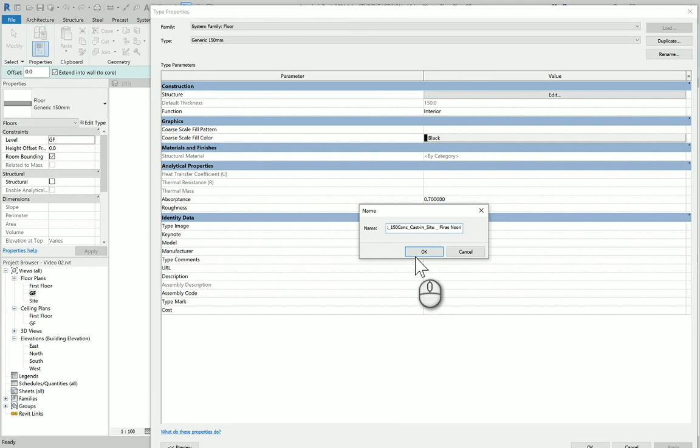It's really important to add your name. 150 as a structural part is more than enough - it's exactly a happy coincidence.

I'm going to keep the structural part, you just need to apply a material, so write here concrete, and here we go, that's the cast in situ. We loaded the material in the right place - insert, then go up and change that.

In this case, I'm assuming that the slab beneath and above are actually the same, so whatever you use here, Finish 2 [5], will be accepted for the exam or basic modeling techniques. Again, it should technically be divided into 2 slabs, one beneath and one above.

I'm going to detail that in a later lecture if you follow the playlist, at the exact location of this video on the playlist. This shall be changed, or must be changed, according to the location.

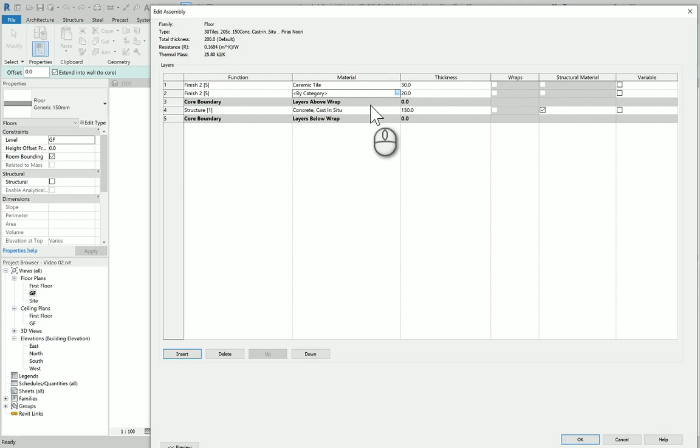Just to emphasize again, I'm going to insert another one. I'll assume it's also an internal one, and we have 30 by 20, and this one should be tiles. I don't care what type of tiles pop up, I'm going to choose it - you can specify later what type of tile you want, and even design it in detail.

Again, not at this level - that's the secret, this is more than enough for me. I'm going to say okay, and then okay again.

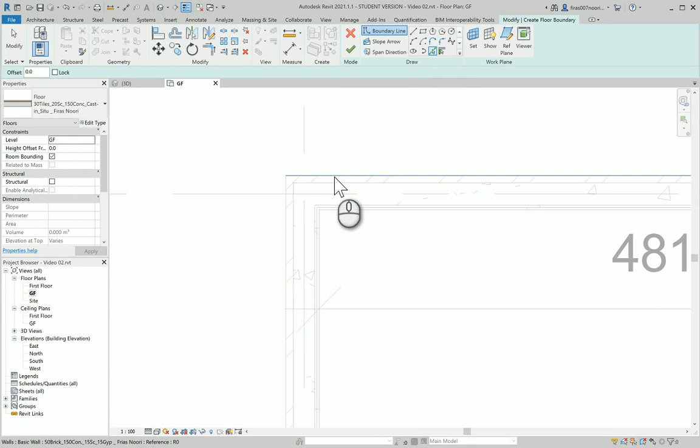Again, I'm going to pick the external lines. You shouldn't actually do this - again, we're going to detail that later, you should pick this line specifically. But for the sake of making it very basic modeling, I'm going to select the external one, which leaves the slab visible from the elevation or any perspective, which is kind of ugly and not realistic, but it's generic modeling, so I'll assume that will be accepted.

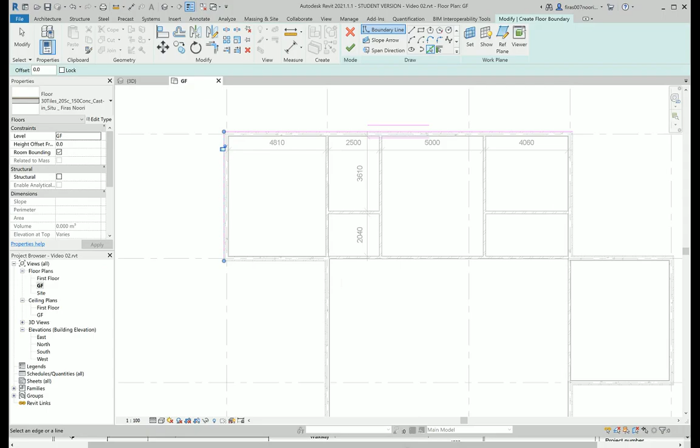The slab inside is 0, as you can see in the plan, outside is different. I want to see if there's an extension of that - there is none, so the slab is located exactly under the building only at that specific level.

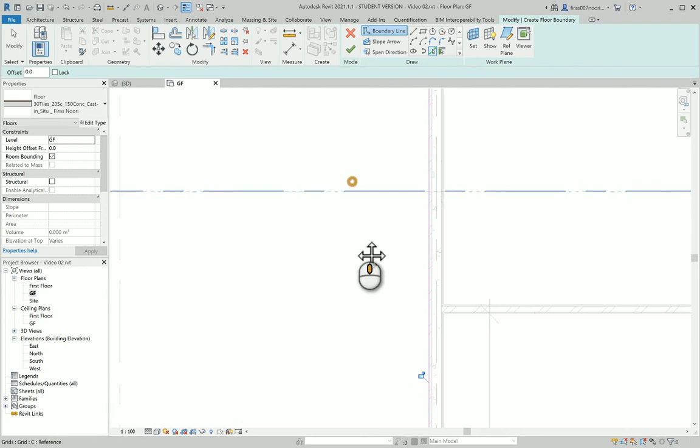Now Revit makes sure to connect the lines to start and end exactly at each point, but it wouldn't hurt you to look at each corner to make sure they're meeting each other - no gaps or overlapping, otherwise you'll get annoying warning messages with orange dotted marks showing where it's open or overlapping. Specify its location - I'm going to be on the ground floor for now, so I'll say yes, that's it.

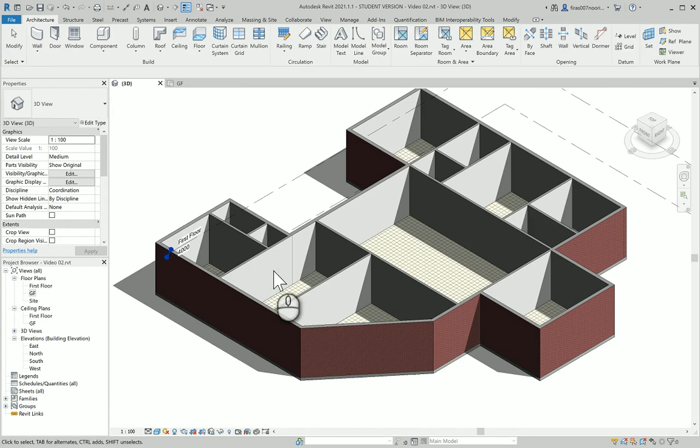The fastest way to deal with it is to copy that guy and paste it, copy to clipboard and then paste. Align to the first level, paste. But when you generate this via copy paste, it won't make an attach.

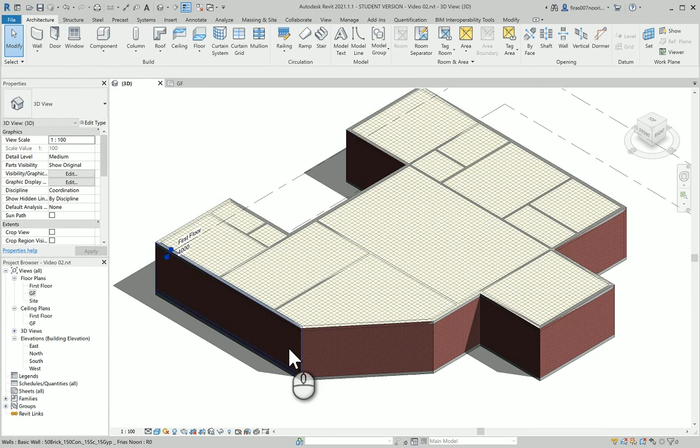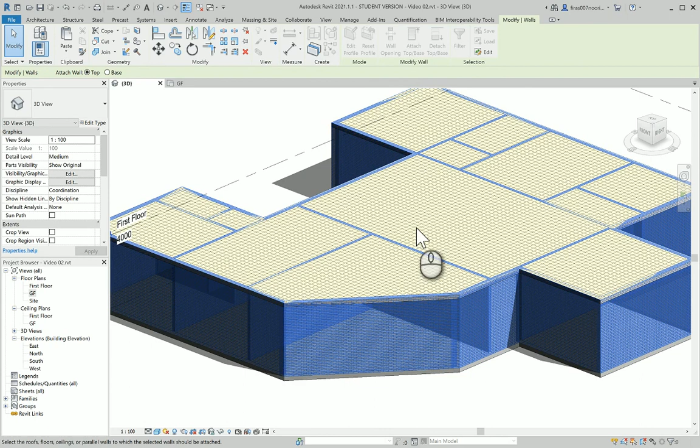That's a bit annoying, and of course you're not supposed to do that manually. So select everything you can reach, go to filter, remove the floors or anything else, remove any level you selected, just keep the walls, and attach top, then select the slab. I have this issue with my beginner students too - they just hover above the middle of the thing. Try to select the edges of the slab so you get it nice and clean, like this click.

Now it's completed. Let's have a look at the 3D to see if there's any cantilever or extension. There is an extension here, don't worry, don't freak out.

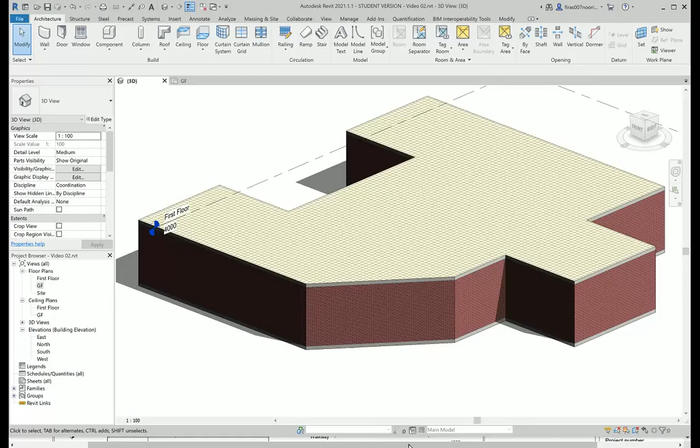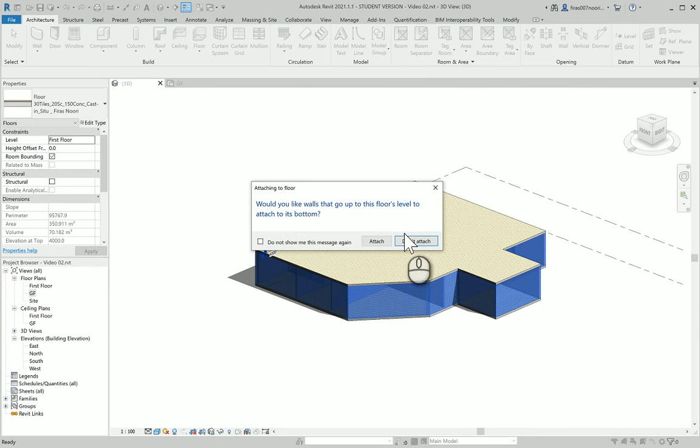Just take this one, go to edit boundary. It's very wrong, by the way, to fix things in the perspective the way I do, but I'm too lazy to do it the other way around. Select those two things and hit TR for trim. It's gonna ask you if you want to do it manually on level 1 to attach the walls. Don't attach, and again you're gonna see the slab. I said that shouldn't be done, but it's okay for this phase of learning.

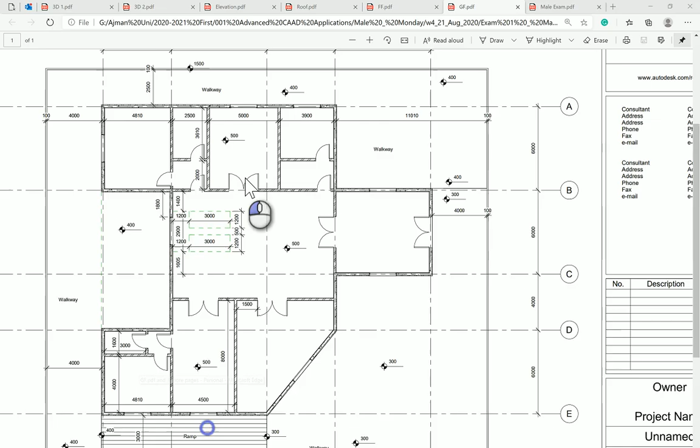We are here for week 4, very beginner, very early phases, so it's okay to leave it that way. Now it's time to look at the first floor. I have the habit of making the constructional envelope part and the external or internal one, mainly walls and partitions, external walls and partitions, slabs, parapets. Then go back for the doors and windows, which has less priority for me. That means GF is finished.

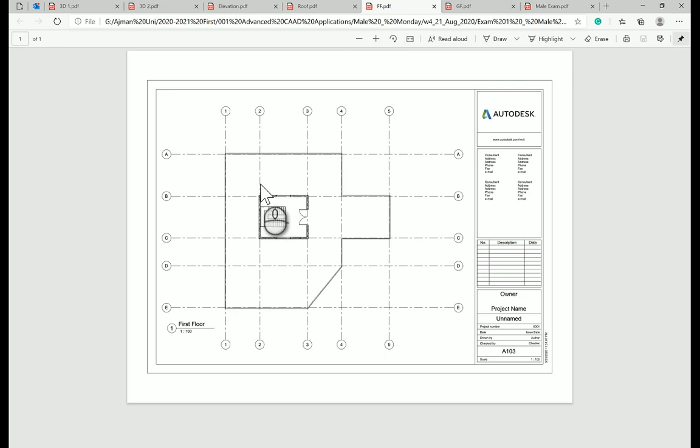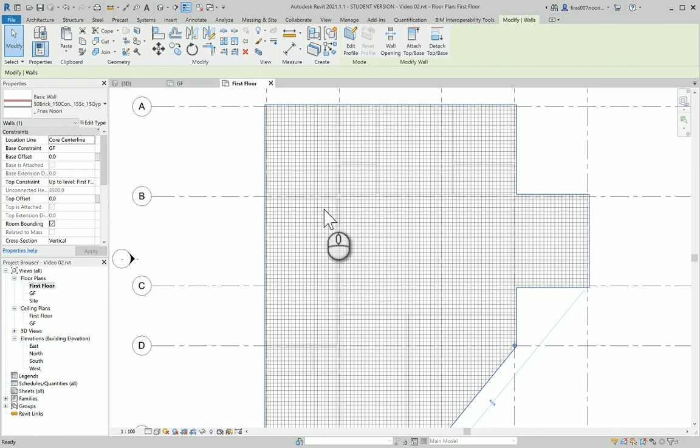Now first floor, jumping in, it's having the same walls as beneath, just located on 2 to 3, B to C. So we have this guy here, the 50mm brick. It's really nice to go to the first floor to do that instead of the plane. You can see lots of distraction here in the way, caused first by the tile pattern. So hit VV or VG on the keyboard, whatever suits you, and go to the floor.

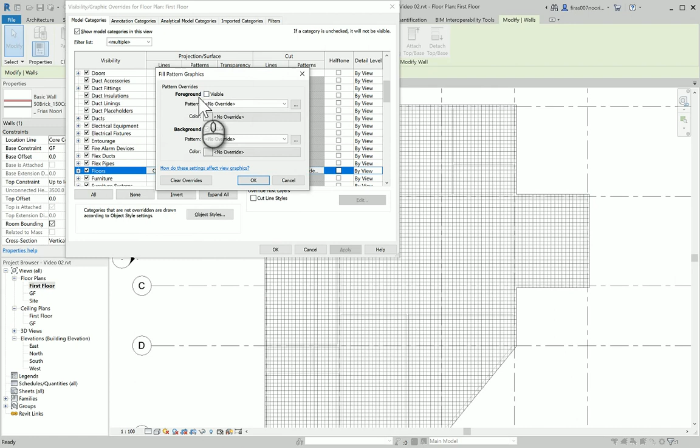Always make sure that when you select the floor, you don't turn the floor as a 3D element, but rather the pattern part of the projection - the elevated part you see in places where you don't cut. So the pattern when you see it as an elevation or projection, remove that guy from the foreground and hit OK, and that's sufficient to get rid of the annoying tiles for that level of work.

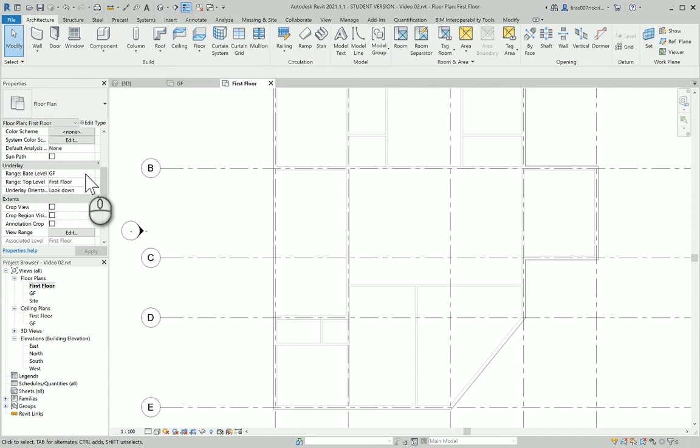Now you can see again, students also complain they're actually seeing the lower levels' partitions. That happens due to the view property, not an object property. Remember, if you don't select anything in Revit, the property panel will just show you the view property. So scroll down to the underlay and simply remove that guy to none - don't show me the underlay here - and that's much better, less painful to the eyes, unless you need that detail to work on the partition. But for me, I know very well I'm gonna need B, C, 2 and 3, so no need for the headache, and it's a good idea to remove those things.

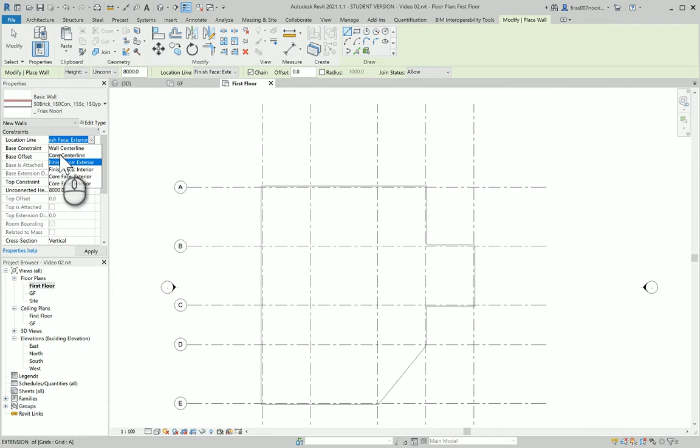Now the benefit of having your names popping up, it's really easy to select which wall you created. Make sure it's not a finished face - I'm gonna use the core center line - and make sure the levels detail here is set to fine. Also make sure you're doing the external part of the wall facing the outside, so that goes clockwise to get the correct result usually, but if it doesn't happen, just hit space on the keyboard.

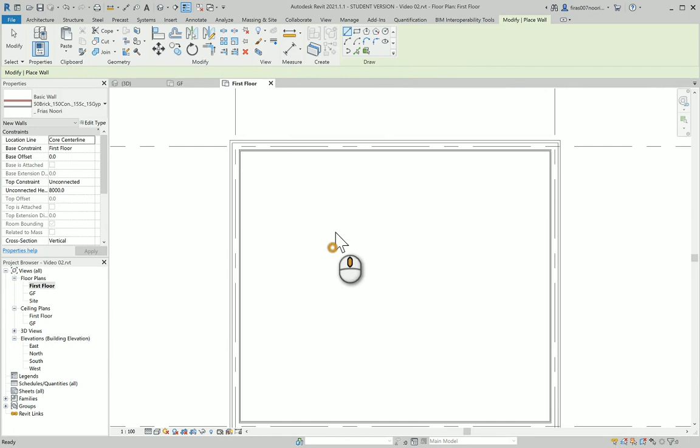Those things are nicely placed. Go to 3D - of course the height will be ugly and wrong, as you can see. We need to check both east and north elevation. Now as you can see, it's a mess as a tagging thing. It's okay, but again you have to create the level.

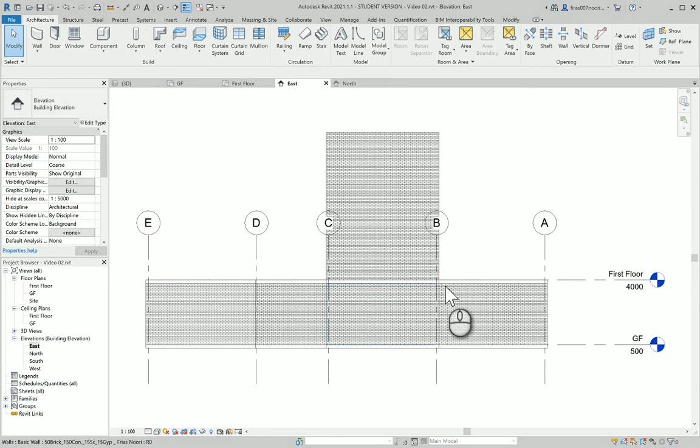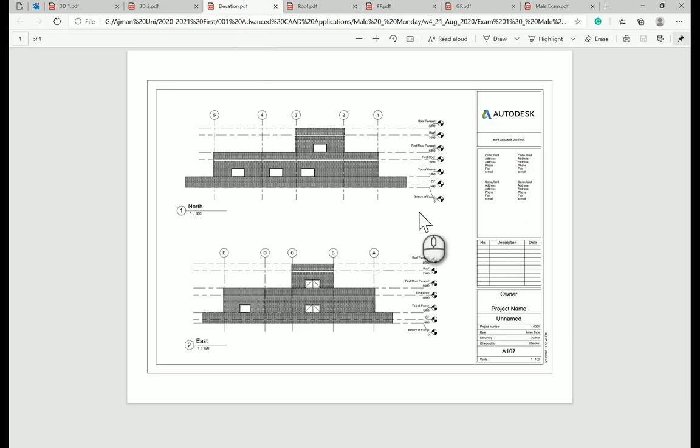So I'm going to stick with the east elevation, it looks like more has been taken care of. I'll extend this guy here and keep this bubble so I can show you the error you'll get if you keep them at that level. I'm going to lower them to make sure the error shows when I go to design the roof. So we need a level, and I had no idea where it was, so let's go to the elevation, zoom in, and see where the roof is located.

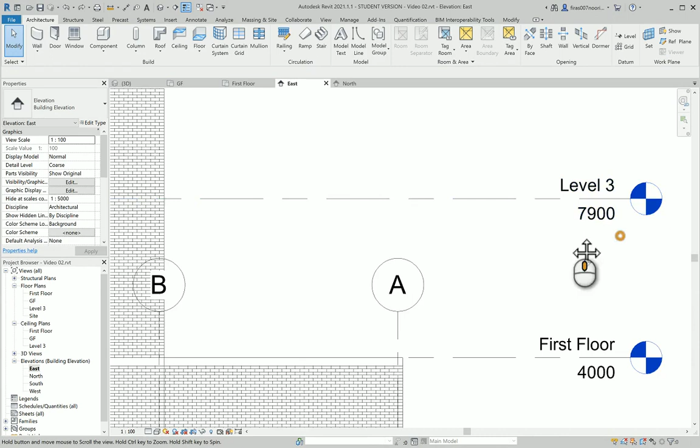It's 7,500. Beautiful. So go to levels, and I don't need to waste time on it. Double click here - I didn't mean to break it, so I'm just canceling the command with a couple of escapes. The breaking here is really happening a lot today. That's 7,500, and not the roof, not level 3, but rather we call it roof.

So rename the whole thing and accept the default setting to rename everything accordingly. And while we're here, it would be a great opportunity to get rid of the parapet. As shown here, it's 1000 mil, and again 1000 mil here.

That's nice, so let's do that. Just copy that, and remember, when you copy, it creates a level but without a floor plan - see, it's a black head. That means it doesn't have any plan associated with it, not like when you create it from the architecture level, which creates both a level and a floor plan. That's what we named roof a couple of seconds ago.

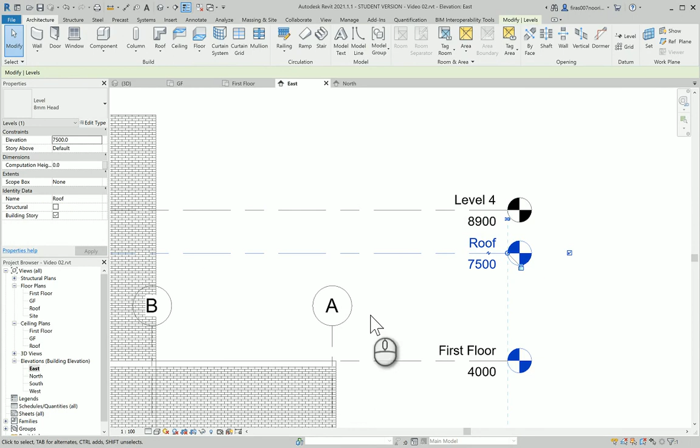Anyway, 8,500 here. Probably you need to break it because the text is actually overlapped, so break it and push it up. And the name definitely needs to be changed, so roof parapet.

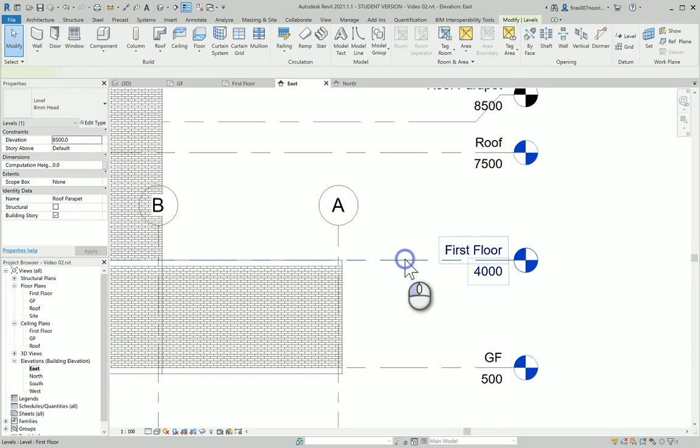And this needs to be copied also, so copy that guy up 1,000 - I'm dragging randomly, as you can see. So that's 1,000, and again break it, push that up. Naming is really important, so I'm going to say FF parapet again.

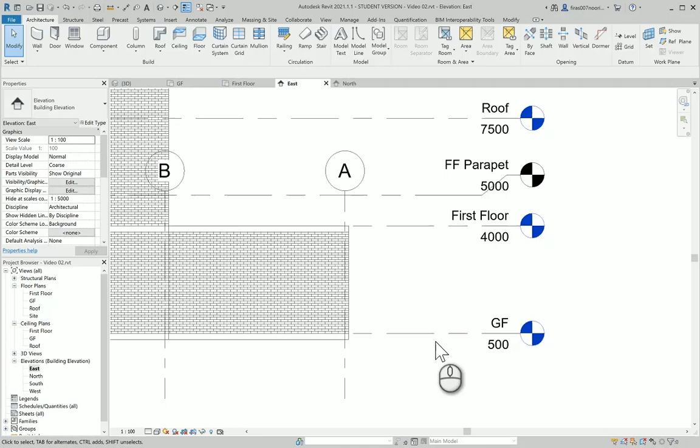And here we go, as well here, let's do those two things. So top of fence and bottom of fence, it's 0 and 1500. So it's time to copy - push that up 1000 and break it. And here we go, that's the top of fence.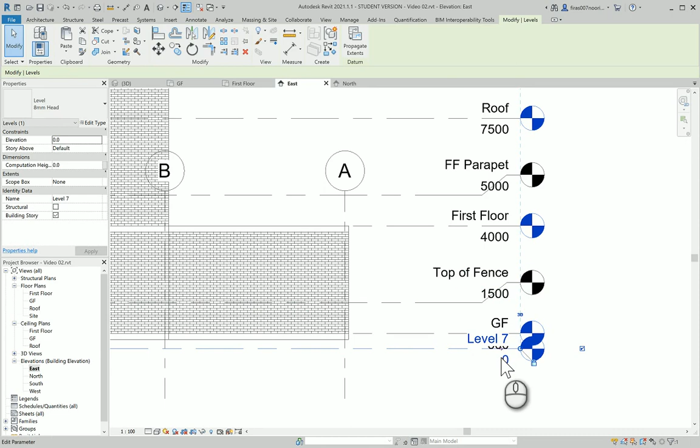And copy that guy down - 500 is enough, and break it, and drag it down a little bit more. And that's the bottom of fence.

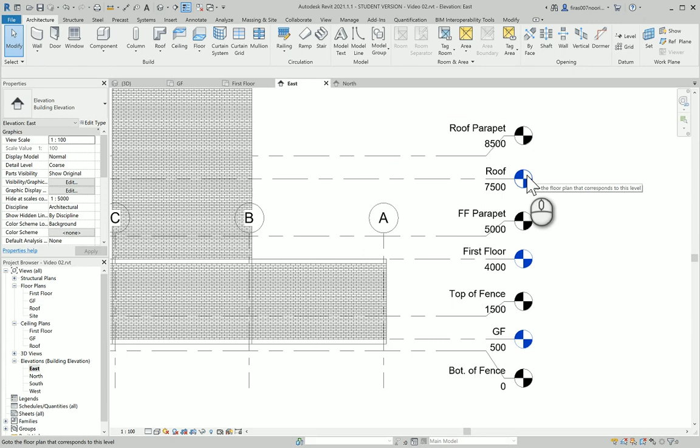And that's it - all levels have been set. Try to recognize and understand the black head versus the blue head. The black head doesn't have any floor plan associated with it, just levels. The blue one is both levels and floor plans. So now that's been done.

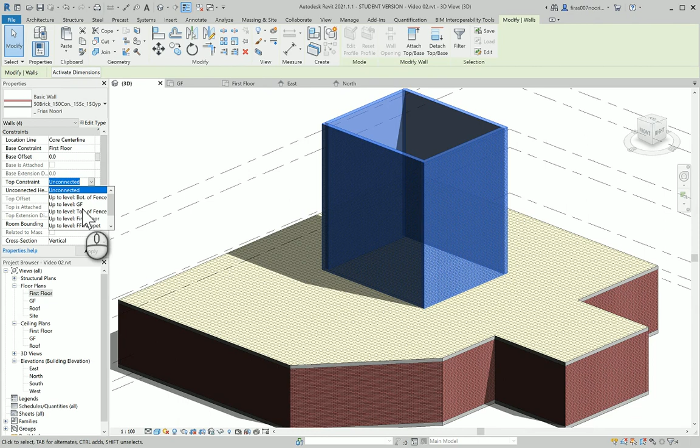The north elevation looks nice - sorry, the east elevation is actually looking nice. So now we can get back to the modeling, again first in 3D. Hover above the wall, hit tab and click, and then from the top constraint, choose the roof, isn't it? Yep, this one, and hit apply.

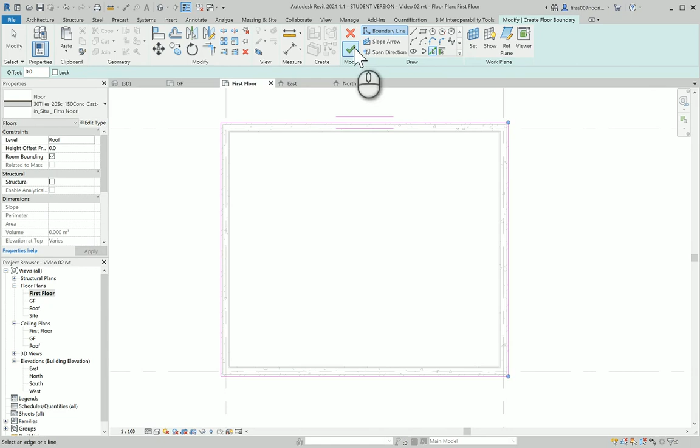Now in the roof, you can go to the roof and create the slab, or just go to first floor, which will be less painful. So floor, and again I'm picking the external walls, as you can see, and this time I'm placing it above - here on the roof, and hit apply. And when you finish, it's going to ask you to attach, accept, and go back.

As you can see, nice. Now the parapet, while we're in it - let's go to roof, and that's really the scary part. That happens because you don't see that the grid is not actually being extended sufficiently or correctly. And as you see, the roof is here - that's what we were looking at.

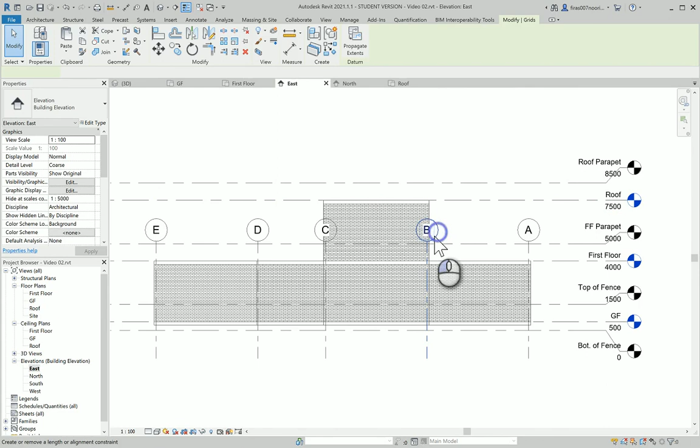We are looking above the roof by like 4 feet or something, and that doesn't mean I'm intersecting with the grids - that's why the grid is not being shown. So you have to make the grid higher as a level than the roof itself in order to get this intersection. When the intersection happens, you're going to see the ABC part of the grid shown.

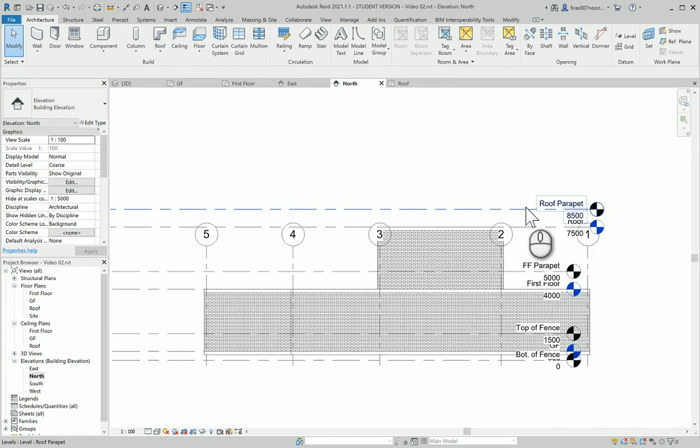That's what the student also complained about - why am I seeing ABC, because you just intersected them without the 1 2 3, and the 1 2 3 means you need to go fix the other elevation. That's the time you have to set it all properly, watching for that alignment blue line so they all get attached to each other. And for those in the class with me, I will cut grade if you don't fix this overlapping. The overlapping means you don't know how to do it, so you'll lose grade for it, boys and girls.

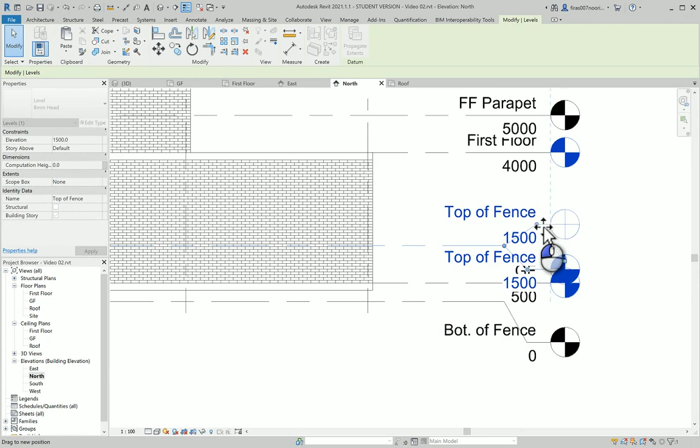Make sure you fix this accordingly using this elbow or breaking tool, whatever you want to call it. It won't take a second, so please do it—it gives a good indication of organized professional work rather than a messy result if elements are overlapping. Now push that up as you did in the other elevation. Things here look much better now.

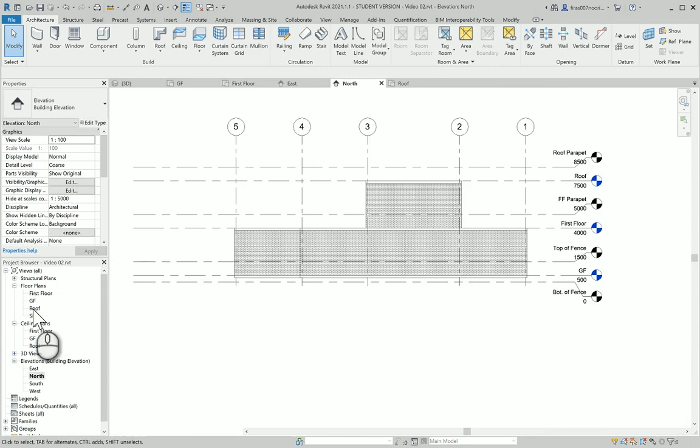If you go to the roof, you're supposed to see both X and Y, or horizontal and vertical grids. Now you should go and select one by one and tick the thing, but that's a bit boring, right? So go to the GF, select those guys, hit Control, and try to pick the propagate. Pick that on the roof, and then the floor.

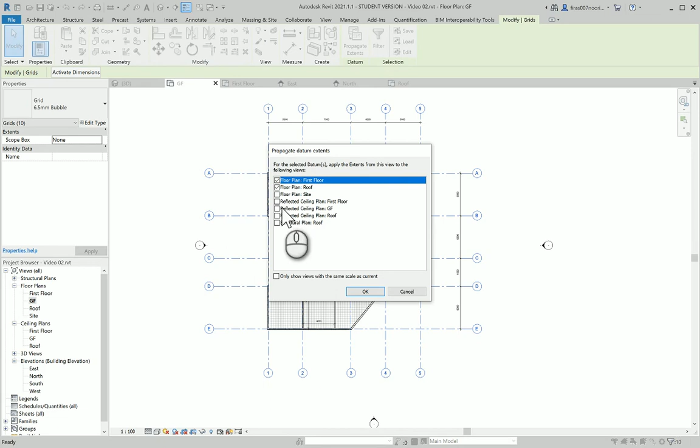Usually students go check the ceiling things, but ceiling plans are viewed looking up, not like those. I didn't actually click on them yet, so sometimes people click on them and go to the floor plan and don't see anything happen. Anyway, that will guarantee at least to fix this issue, as you can see.

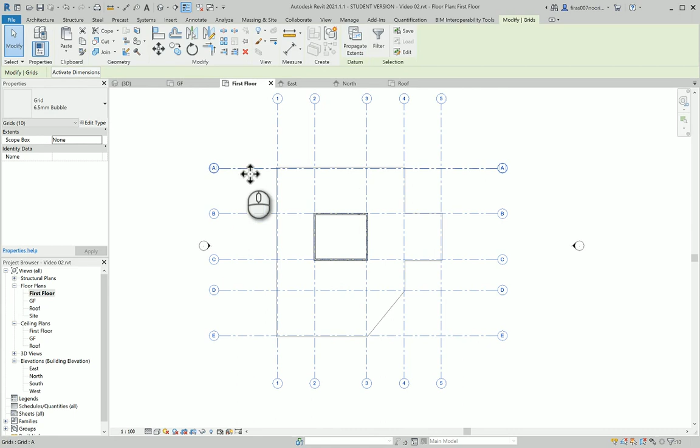Imagine if you have a tower with 200 levels or 150 levels and you want to do the grid one by one—I'm pretty sure your boss will kick you out of the company. So don't do that. Just use the propagate tool to propagate the decision you create on one level of a grid to any other group of levels you want.

So that's it for making the grid and the modeling. Now we need to go make the partition, the parapets. The parapets—I think it's been given as a specification here in the paper, where is it?

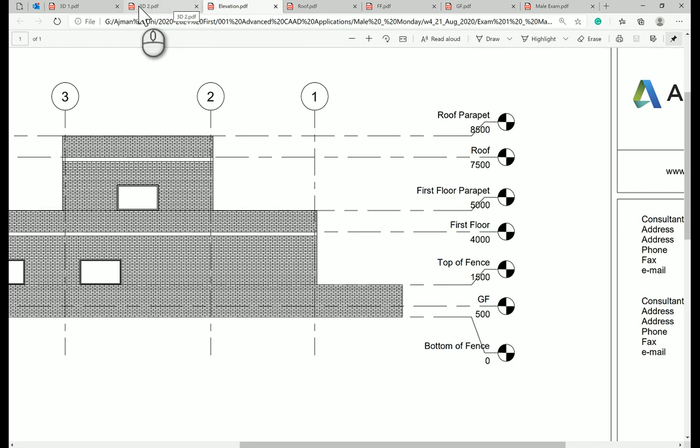Let's do that. First floor located at 4,000. Parapet is 100 mil brick, 1,000 mil high. That's all we need.

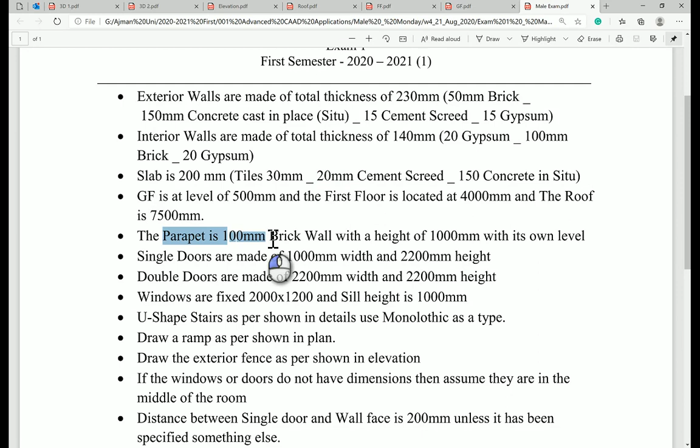Again, don't start from nothing—there's a 90 mil brick wall. Get it, duplicate it, and just say 100 brick and then your name. I don't know what happened with the brackets, they keep coming up.

Edit the type there and make it 100. It's easier than creating from a generic one, so try to pick something closer to your work wall or any other family type you want to create. Make sure you have function exterior.

You might need to get rid of the grid if it's making problems for you. This wall should go straight to the upper level, but I can see now it's unconnected, which disputes my hypothesis badly—it's going to be high and ugly again.

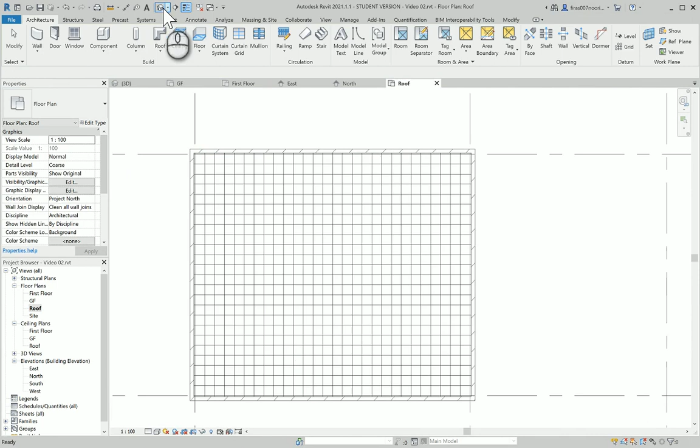No worries, just hover, tab, click, and pick that guy to be top of the roof or roof parapet, whatever we call it. Same technique you use on the first floor.

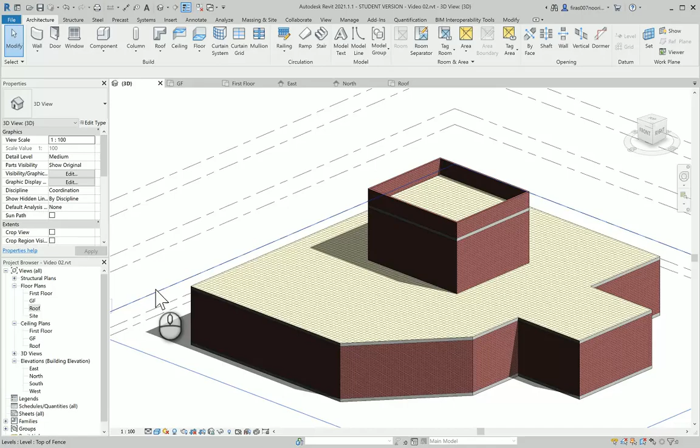Go all the way around the slab. You need to go to the first floor and again to the wall—the previous wall will be picked automatically. Just for God's sake, pick the top of the fence for the first floor parapet here from the beginning and hit apply, rather than leaving it for an extra step.

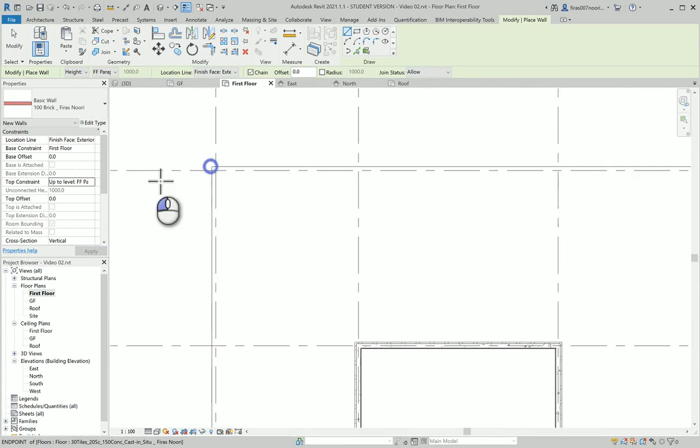That's good if you create the levels from the beginning. It depends, because in a bigger building with lots of levels, it will be very hard to pick the correct level—it will be painful. So create the wall and then create the level only for it.

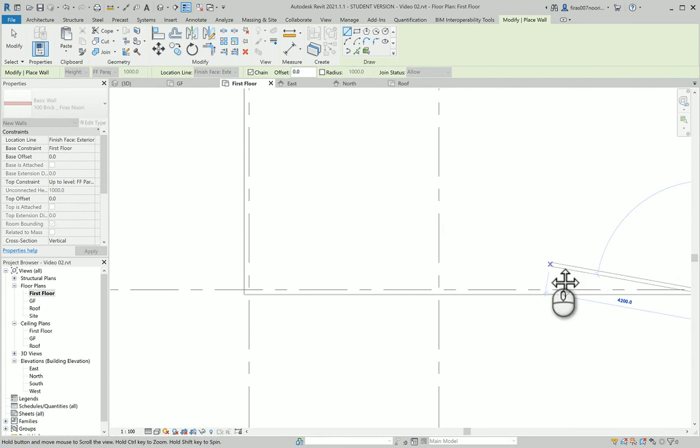It depends—for a small project it doesn't really matter. Actually in a small project, making the level previous to the parapet is much better, but that's not really true in bigger projects. So let's close that—it should be nice and fine now. As you can see, the external walls have been placed properly.

Now I'm going to place the outside quickly. I think we passed 20 minutes already, so let's go make the ground floor quickly.

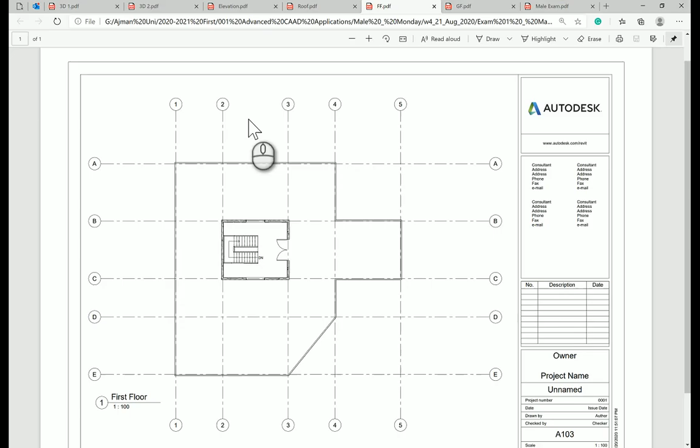So what do we have here? Again, it's the ground floor—back to the ground floor. It's 4,000 on the left side, 4,000 on the right side, and the floor is stopping here flush with the wall facing north, then stopping down facing east and west. Beautiful, so we have 4,000, 2,000, and 4,000.

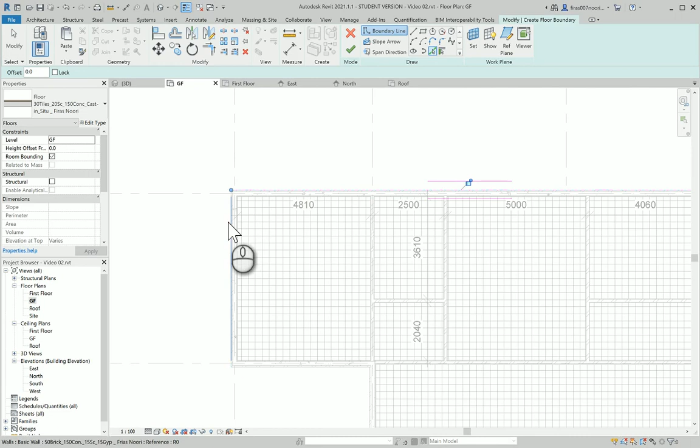I wish I could remember all this, but let me try my weak memory here. It's just a normal floor, and you need to pick those guys as such, quickly. All right, so those have been picked easily. Probably turning off the inner detail will make the pain less.

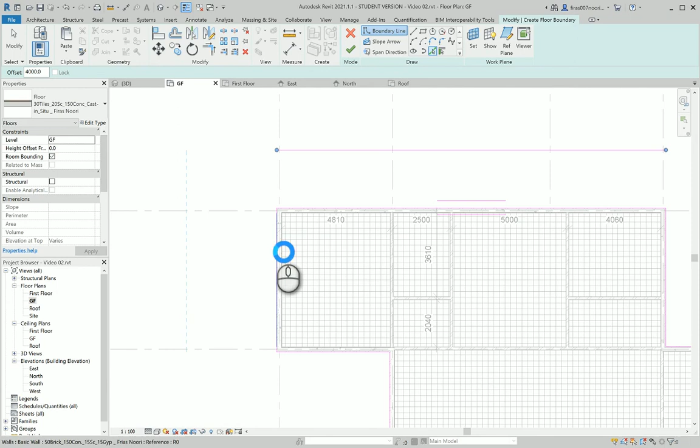We don't need this level of detail right now at that specific point. Now either go copy, or you can just activate the offset, so 2,000, and you can just pick the thing here. See, it's gonna draw it for you. Easier, the lazy method. And you can go here for 4,000 to the west and another 4,000 to the east, and that's the wrong thing, isn't it?

Yep. So I'm gonna take for the grid, or from the grid, and go DI and add the dimension to this point. Yep, that needs fixed. So select the line and make it 4,000. Just too lazy to do it the other way around. Get rid of the dimension.

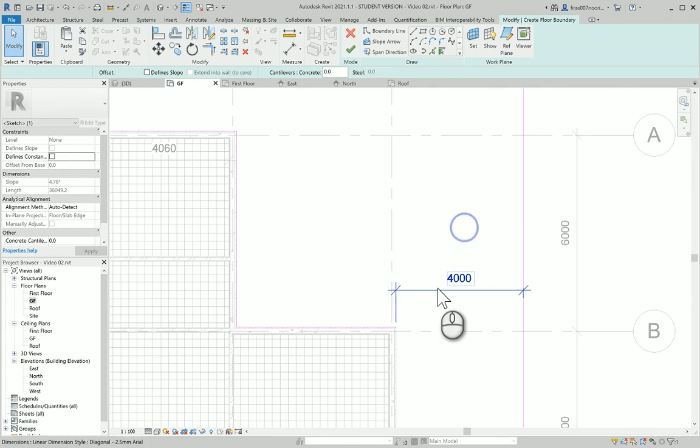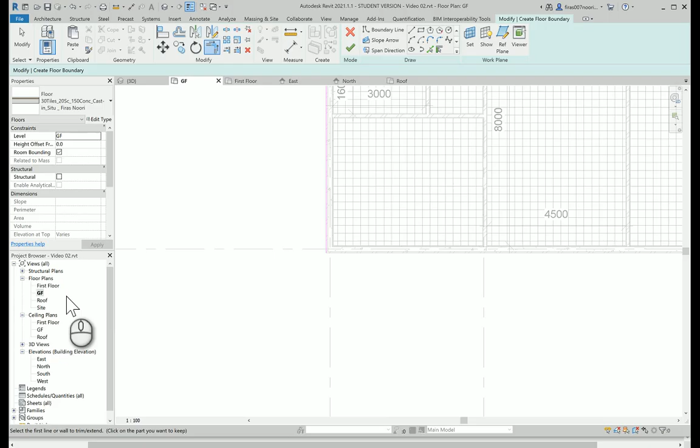Now TR on your keyboard and do the trim thing. This is a flush with this one. Oh god, now we need another one here. And how much? I absolutely don't remember. So it's a 2,000. Oh, it's a 3,000. Okay, it's a tricky question in here. And back, and probably you're gonna need to draw a line of 3,000 down.

That's for the ramp. Take it anywhere to the west. Make sure it's just horizontal. Then TR, select both, and the life, you're gonna be really happy with it. Now that's been done as a sketching boundary.

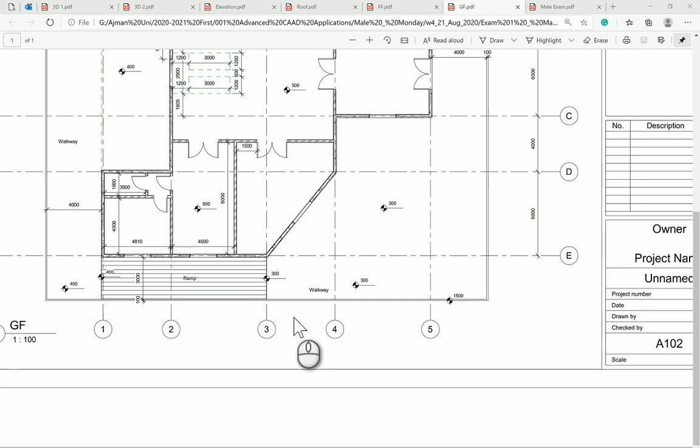Now you need to know the level. It's a 400, so it's minus 100 from the ground floor. You either do everything related to the ground floor, or you simply create a level for the walkway, which is going to be messy. So no, because we have two levels for the walkway, 400 and 300. So I'm referring to the ground floor, which is 500. So this guy should be minus 100, that's the ground floor. So minus 100 from the GF. Hit finish, and things going okay.

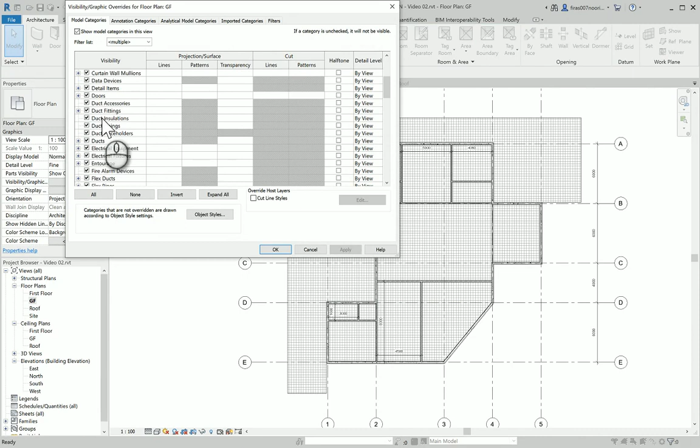Now VV again, and that's the painful pain of seeing the tiles. So I'm removing them out of the way. As you can see, much better. Now go to annotation, always check your work, have the spot, click 3 times, 1, 2, 3, and then click 3 times, 1, 2, 3, and so on. After you create it once, just click copy paste, less pain than clicking 3 times.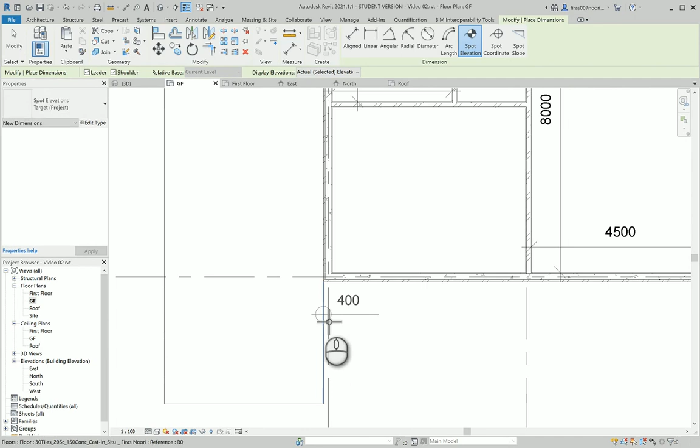And that's it. This is the ground floor. This is the external slab, has been placed normally, and the other part of it has just been taken with the grid and completing the shape. So that's less pain. Let's do that.

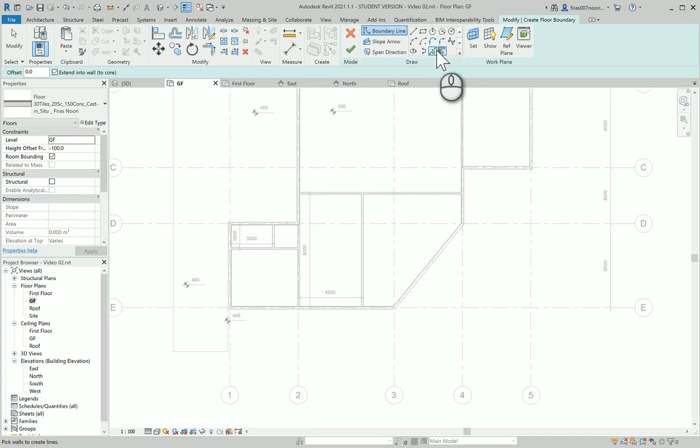So just pick a line. I like picking the lines. This is easy. It's a bit confusing, but you're gonna get used to it. Again, picking the turning of the detail here is really nice.

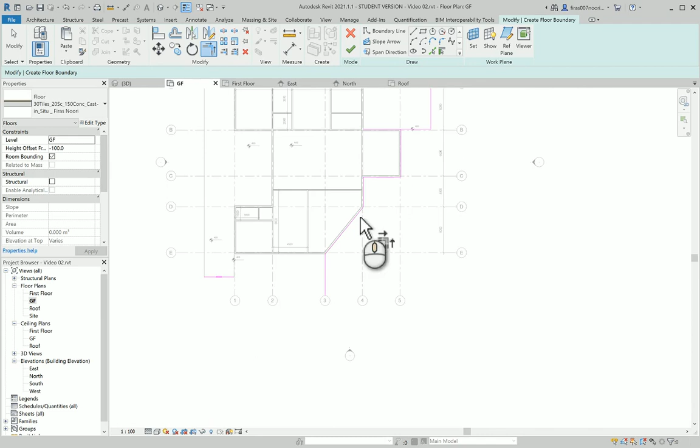So trim this dude with this guy, and yep, we need that guy with that guy, and then we need to trim this one. Oops. We need to trim this guy with this guy. That's what we want. That's what I want.

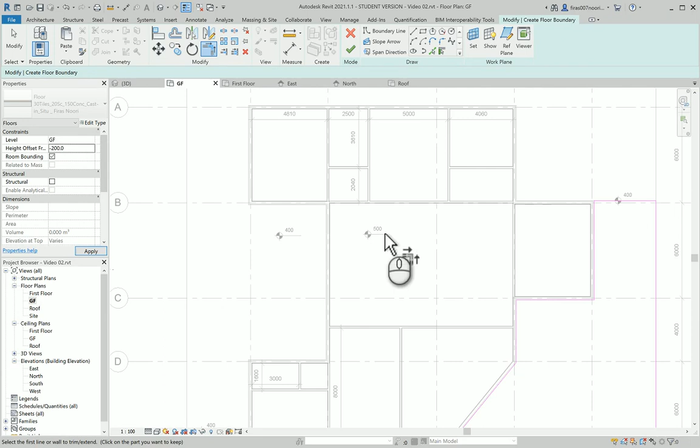See, no overlapping and no gaps, and it's minus 200 because it's a 300 mil out of a 500, so it should be minus 200. Hit finish, and again, just take that guy, copy it like this to prove your work. Nice and neat. Copy that guy again and push it at the slab here.

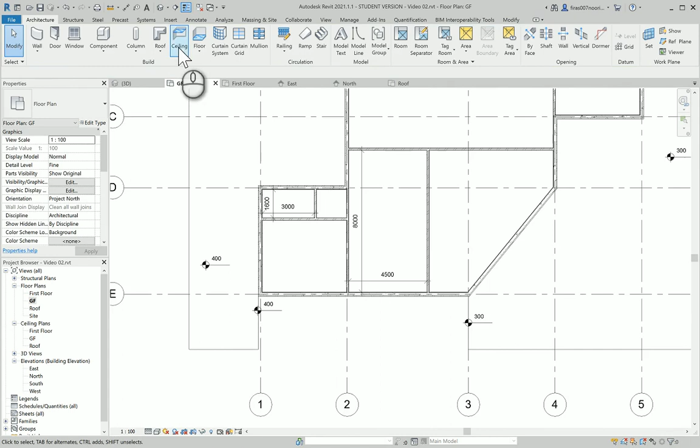That will be releasing the pain out of the whole thing. Now I'm gonna create another floor for the ramp. Again, picking the thing, and this time I'm not gonna be lazy. I'm gonna turn off the detail. And 1 and 2, 3 and 4. Now trim this one with this one, this one with this one. If you hit yes, you're gonna get an error because of that. Don't do that. Trim it.

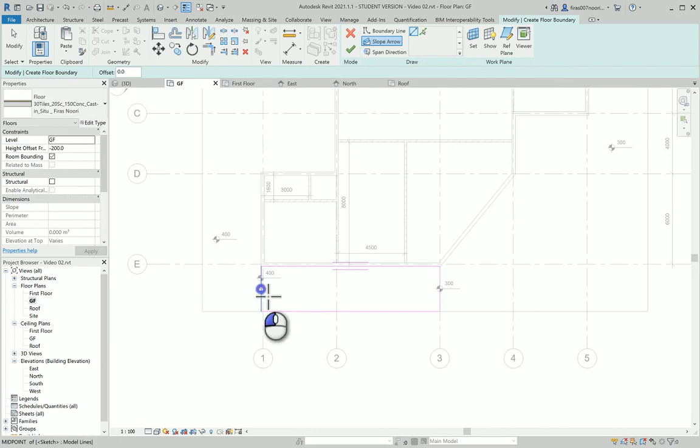Now this is a plain leveled floor, which we don't need. We need a slope, so I'm gonna place the arrow like that. Hit escape and then select the arrow itself.

Now carefully read, it said height at tail. So at this point, instead of the default, which is kind of ambiguous for me, I'm gonna say the ground floor. And I'm gonna offset that minus 100 because it's 400 out of the 500, and then level at the head, and I'm gonna say again GF, and minus 200 because inside is 500 and we have a 300 in here. I don't know where is my inside. Yeah, 500, so this is minus 200.

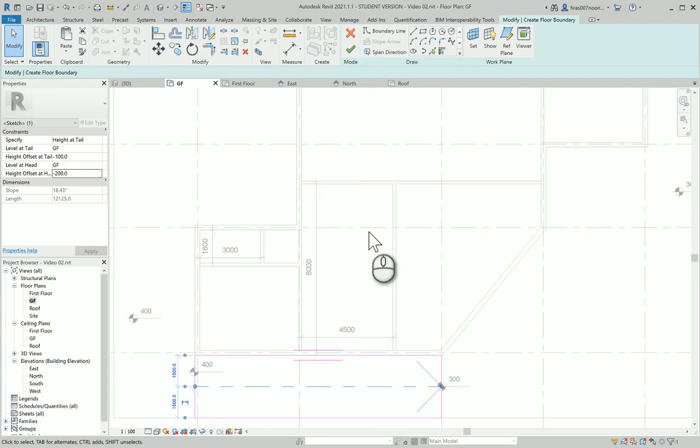Hit OK, and I wish that that's going right, and it's just go 3D. And as you can see, it's as smooth as you can get. Really nice. See? Flush and nothing.

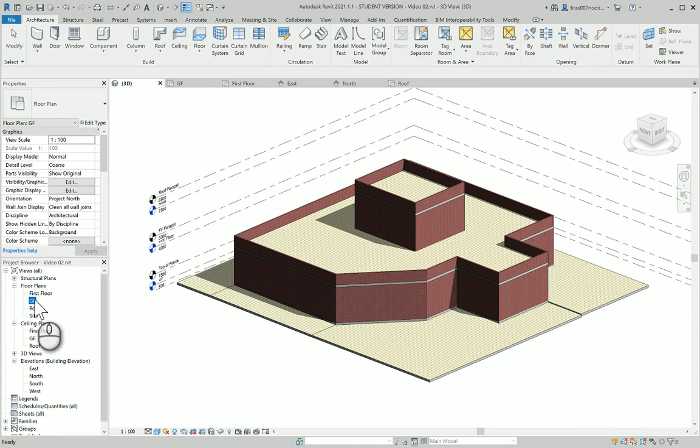Now the last thing to add, last thing for today, is how to create ground floor fences. And actually, probably it's better to be in the next video because I think we passed half an hour. So I'll postpone that, boys and girls, for the next video to make the fences and doors and windows.